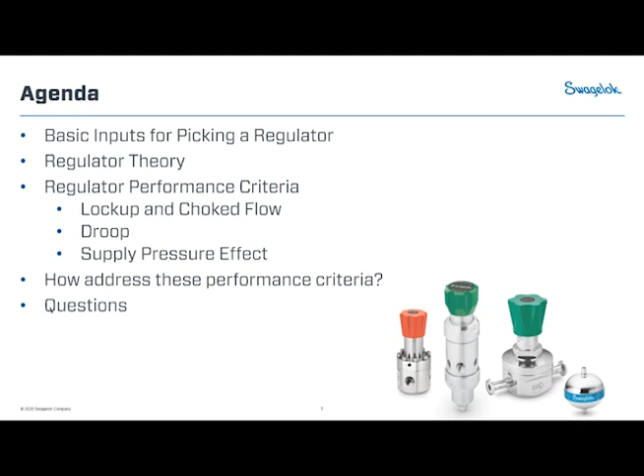So moving on to what's needed to select your regulator. I kind of think about how I used to pick regulators, and granted, this was before I learned the intricacies of the regulators and really more importantly understood them. I'd often go to my box of regulators and search for one thing: outlet pressure of what I was trying to accomplish. And this approach just simply isn't good enough. I may have gotten an okay result, but really it could have been much better.

When investigating a regulator for your application, be sure to understand the flow that you need. This could be a single value, but depending on the process, you may want to consider flow as a range. Inlet pressure, of course, is an important piece from the perspective of safety. Of course, you never want to select a regulator rated less than your inlet pressure, but picking something close to your system pressure will actually provide better results. Outlet pressure, in general, you want to be as close to your desired pressure as possible.

Speaking of media, most manufacturers usually create gas flow curves using air or nitrogen and hydraulic curves using water. If the system media is a different fluid, it may be necessary to adjust the flow scale to account for the differences between the specific gravity of the actual system fluid. Like media, temperature may also require some sort of a correction factor outside the range of lab conditions.

Accessories is a big important thing that you want to always consider as well. How are you going to relieve downstream pressure? Relief valves are a good method of doing that.

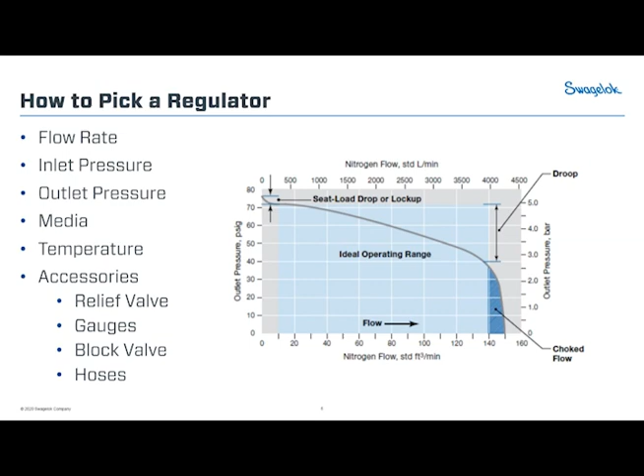So moving on to regulator theory, a regulator is just a purely mechanical device whose main purpose is to maintain a constant pressure on one side of the regulator, even if there's different or fluctuating pressure on the other side. In the case of a pressure reducing regulator, pressure is controlled downstream of the regulator. The schematic on the right shows a higher pressure source of gas coming from your bottles and then going through a pressure reducing regulator to control my process.

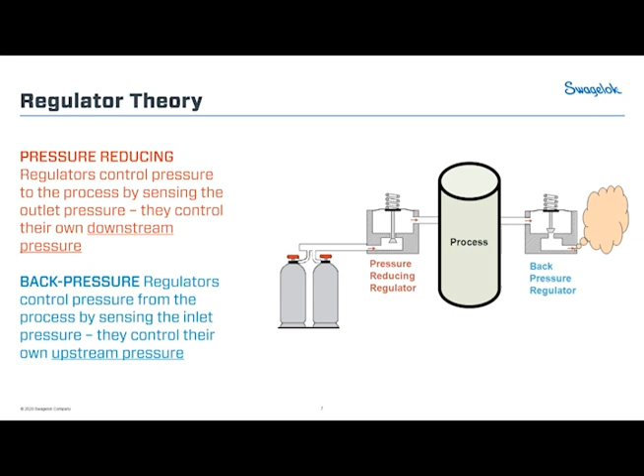A back pressure regulator, on the other hand, uses the process pressure as its inlet and senses and adjusts when the upstream pressure increases. It's important to note that this presentation applies specifically to pressure reducing regulators, with the exception of this introduction to back pressure regulators. And the reason I note this is because the flow curves we're looking at are going to be for pressure reducing regulators, and they would look different if they were for back pressure regulators.

More on basic theory. If we take a look at a section view of a typical regulator, there's four main components that I want to focus on in our pursuit to understand how a regulator works. I'd like to break this down into two main categories. One is my control element, made up of a seat and a poppet. Next is a load and sensing element, made up of a range spring and a diaphragm.

The range spring could be gas in the case of a dome-loaded regulator, which we'll learn about shortly and how it helps us to minimize droop. Also, the diaphragm in this case could also be a piston if we get into higher outlet pressures.

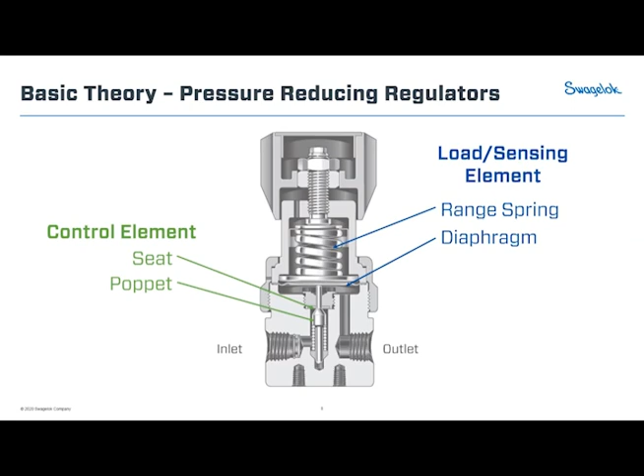Moving on to my operating principle, the balance of forces. When learning regulator performance, I found this equation to be extremely helpful, and I'm going to go through it real quick. My range spring force, noted in red, is F1. This is equal to the poppet spring force, F2, noted in green, plus my outlet pressure force, F3, noted in blue, and F4, inlet pressure force, also noted in purple.

It's important to note, as I mentioned, this is a balance of equations, or a balance of forces rather. So when one changes on one side, it's going to change something on the other side. And that'll be important to note when we work through some examples.

So it's one thing to learn the definition of droop that we'll talk about shortly - that's your increase in flow caused by a decrease in outlet pressure, or actually, when you increase flow, you get a decrease in outlet pressure. And it's fine to understand a definition, but to really understand this formula, note that F1 will decrease when downstream flow increases, which is required for the poppet to open and allow flow. Now, because you have a balance of forces, F1 drops and then F3 will drop too.

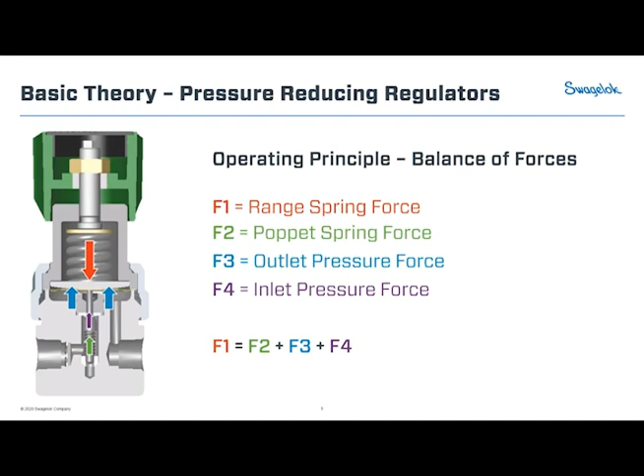So let's get into our first term. I like talking about lockup and choked flow together because of their relative position to one another on my flow curve, the far left and the far right, basically where we don't want to be with our regulator. On the right, we see a typical flow curve, two to be specific, and it's important to note that these are independent of one another.

They're there to fit two or more scenarios onto one graph. This graph has outlet pressure on my y-axis and flow on my x-axis, just like we saw earlier.

So regulators always perform best at the flattest part of their curves. That's the least amount of impact that they'll see from changing variables.

On the far left is our lockup zone, which sees a steep drop of pressure immediately after flow starts. Remember when we set that pressure in a dynamic or static application? Now as we apply flow, we get this steep drop. You never want to have your regulator working in this area. In fact, a regulator operating in this steep drop may emit chattering or pulsating sounds as it fluctuates between flow and no flow conditions.

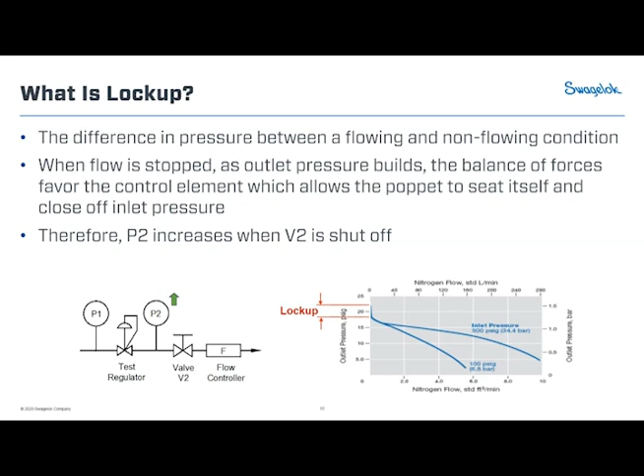Choked flow occurs on the far right of the curve. At this point, the flow demand has exceeded the pressure control capabilities of the regulator. Here the regulator is wide open and it's no longer even regulating pressure. Essentially, it's changed from a pressure control device to an open orifice. Increasing downstream flow to this point or beyond renders the regulator ineffective. It's not advisable to operate a regulator in the choked flow area due to the sharp pressure drop.

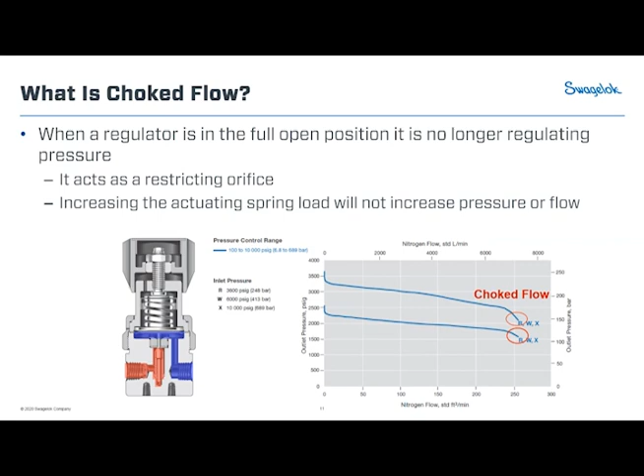Note that flow coefficient is measured at a regulator's fully open position, and that's why it cannot describe the overall performance of regulators. In fact, selecting a regulator based solely on its flow coefficient can result in unsatisfactory performance. If a system flows within the range of the regulator's C sub V, the flow coefficient, one may believe that the regulator is right sized, but that is not necessarily true. The CV represents the regulator's maximum flow capacity, and remember, at maximum flow, a regulator can no longer control pressure.

So now that we've learned about lockup and choked flow, let's discuss dealing with each one. The first rule of dealing with any regulator criteria is understanding the impact. And today's webinar is actually a pretty good first step in achieving expertise in this area.

For both lockup and choked flow, always try to operate in the optimal part of the flow curve. Remember, this is the flattest part and it's ideal. Lockup can come quicker with a soft seat material like an O-ring versus PTFE, but as with any material selection, there's going to be pros and cons on any material. Also, make sure your regulator is right sized and you're not basing adequate flow on the published CV.

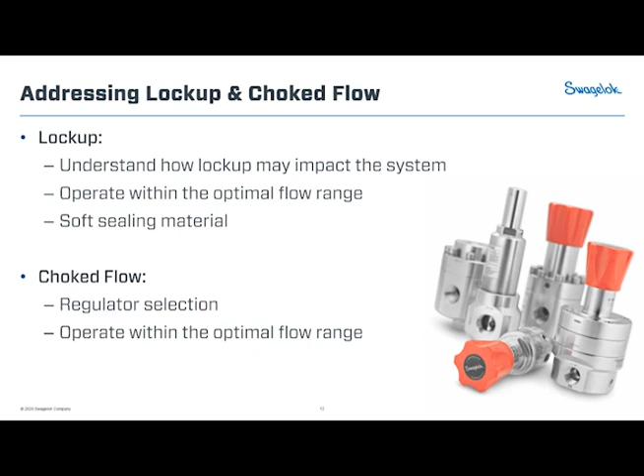Okay, so we've talked about that sweet spot on the flow curve, right? That's the flat spot of the curve, but it's still a slope. This downward slope is known as droop. As your flow increases, your outlet pressure will drop, some or even a lot, depending on the regulator design. While droop is relatively modest along the flat part of the curve, it is quite steep at the far ends of the curve.

Supplying a regulator with pressures substantially lower than the inlet pressure rating results in a flow curve with more droop than flow curves for regulators whose inlet pressure ratings closely match the actual system pressure. In addition, selecting a regulator that closely matches the inlet pressure requirement provides the best handle resolution, smaller amounts of pressure change per turn of the handle, giving you better control and enabling a broader ideal operating range.

So this droop is primarily caused by the set spring, and it's due to the stretching of the set spring, which equals lower force and a reduced outlet pressure. We'll talk about mitigating droop on an upcoming slide.

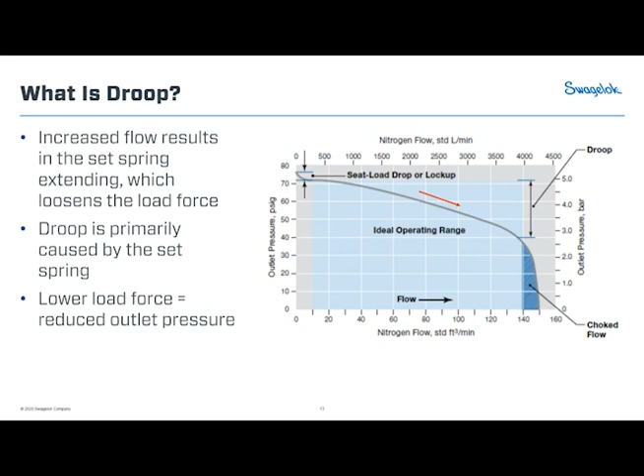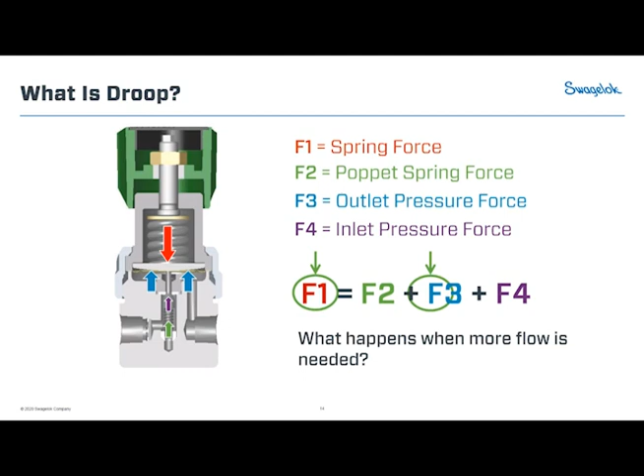The first thing that's going to happen is my poppet is going to open. As a result, my range spring stretches to account for this downward movement of the poppet. So what happens is the range spring stretches. It's going to loosen its load force, and because of my balanced equation, if F1 goes down, so must my outlet pressure, F3. So summing up, droop, back to its definition, it's the drop in outlet pressure due to my increase of flow. Hopefully this equation is starting to make more sense, and I'll share with you a neat animation here on the next slide.

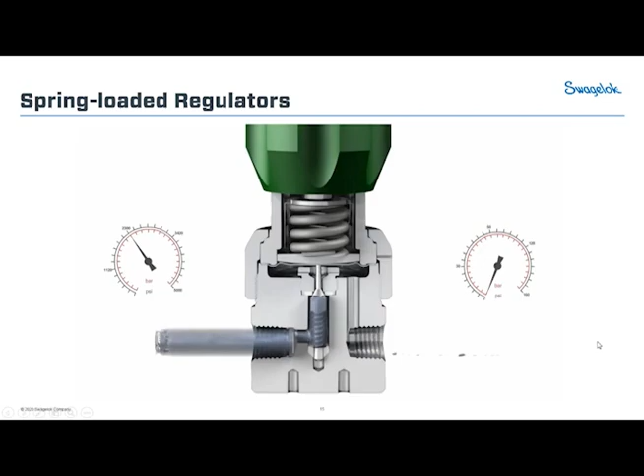As you open your regulator, you get a flow through it, and you see the change in pressure on the downstream side. A close-up view shows the poppet moving up and down to allow flow through the regulator. That's the motion that transfers to the spring force extending, therefore loosening and affecting the balance of forces.

So what have we learned that we could apply to address droop? Well, you can adjust the regulator with your process flowing. This might be an okay solution, but it could be completely impractical based on the location of your regulator in your system to adjust it every time your flow changes.

Second, you can always shoot when picking your regulator to stay in the sweet spot of the flow curve. Again, this is the flattest portion.

Third, you could pick a regulator whose inlet pressure rating closely matches the actual system pressure. The idea of picking a 3600 psi inlet seems great to accommodate more conditions, but in reality you may have to take a performance hit. I used to pick regulators based on this criteria myself, and now that I've learned it's not ideal and negatively impacts droop, I know better to pick my inlet pressures closest to my system.

We could use a dome-loaded regulator. As we noted, the change in spring force impacts droop the most. Using a dome load, which is a gas-sealed dome that applies your force, eliminates the need for a spring. We actually have an example of a dome-loaded regulator on the right, where we've got a red regulator providing force above the diaphragm instead of having a range spring up there.

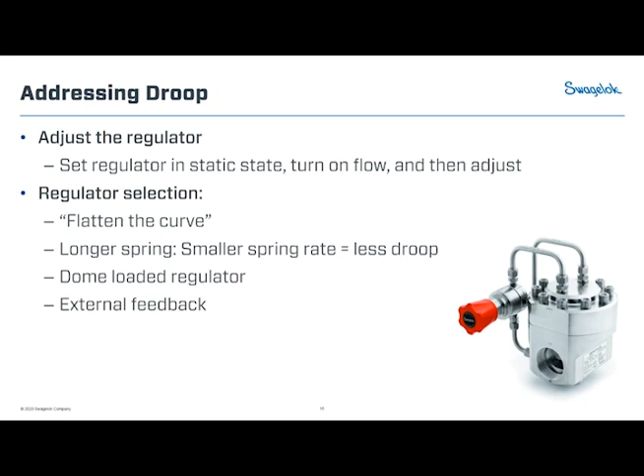Supply pressure effect, also sometimes called dependency, is a ratio describing the change in your outlet pressure per 100 psi change in your inlet pressure. In other words, for every 100 psi drop in inlet pressure, the outlet pressure will increase by X psi. X is the supply pressure effect.

For standard pressure reducing regulators, the outlet pressure increases as your supply pressure decreases, and the opposite is true as supply pressure increases. This effect can also be realized on system startup or shutdown. The regulator should be set to the off position before turning the supply pressure on or off, to prevent overpressurization of your regulator diaphragms, outlet pressure gauges, or other sensitive equipment downstream.

I talked to a salesman the other day, and he mentioned that his customer adjusts his regulator throughout the course of the day, and at the end of the day simply shuts off the block valve on his cylinder without turning the regulator off, because in the morning it's one less thing to adjust to get the process going. This is a risk.

If you open that valve, there's a brief moment before the regulator starts performing its function where the system is going to see a high pressure spike. That could damage the diaphragms or your gauges, or again, if there's sensitive equipment downstream like analyzers or other electronics.

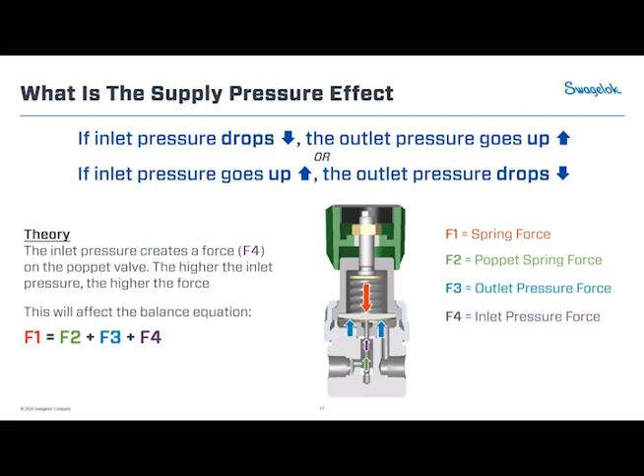Also, when selecting an anti-tamper model, it's important to make sure that the supply pressure effect will not cause excessive overpressurization on opening and closing of the supply pressure.

So let's see how this calculation applies to the following scenario with a single stage regulator. Let's say I have a supply gas coming from a cylinder at 3,600 psi. Next, we adjust our outlet pressure to our process of 50 psi. Now, as we run our process for a period of time, my cylinder pressure is depleted to 2,600 psi.

So let's apply the formula to see the impact on our 50 psi outlet. The inlet was 3600, now it's 2600, so the delta P is 1,000 psi. You apply the supply pressure effect percentage to this number. In this case, we've got a 1% supply pressure effect, so we get a 10 psi change. So now my outlet pressure, which was 50, is 60. And the question is, is this safe or not? It really depends, again, on what's downstream.

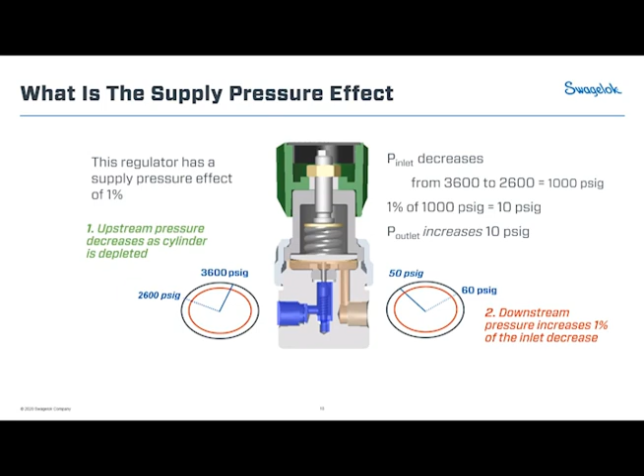So what can we do to address supply pressure effect? A few things. One, you could stand there and adjust the regulator, but again, that's not always practical. Two, we can move to a two-stage solution, which we'll demonstrate in the next couple of slides. Or three, you can move to a balanced poppet design, which changes the surface area on which pressure can be applied to the poppet, and therefore you can actually decrease your supply pressure effect. That last one, however, is a design feature of the regulator.

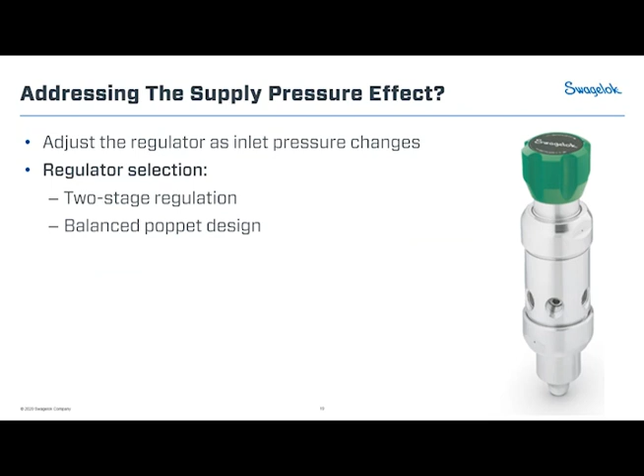So let's see what we can do to apply a two-stage solution.

Now let's see how the inverse of the supply pressure effect will actually work in our favor on the next slide.

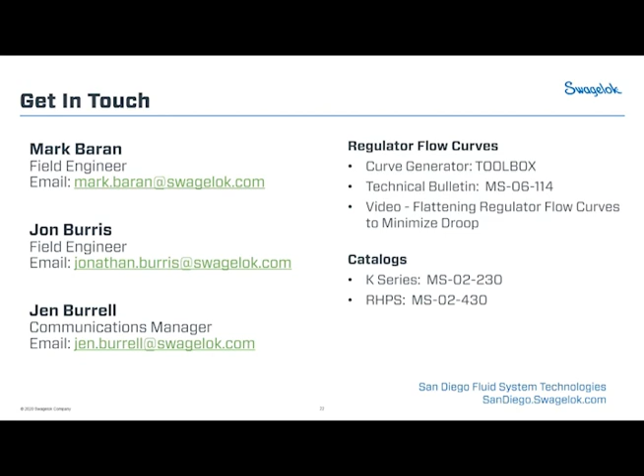Coming back to the expander versus the regulator question, I didn't see anything clarifying what the expander is, so we'll circle back with you and get in touch. If we don't have your contact information, definitely use the email that Jen has provided for myself, Jon, or Jen herself, and we'll gladly circle back and answer all your questions. Sorry I didn't understand the expander question, but hopefully we'll get you answered offline.